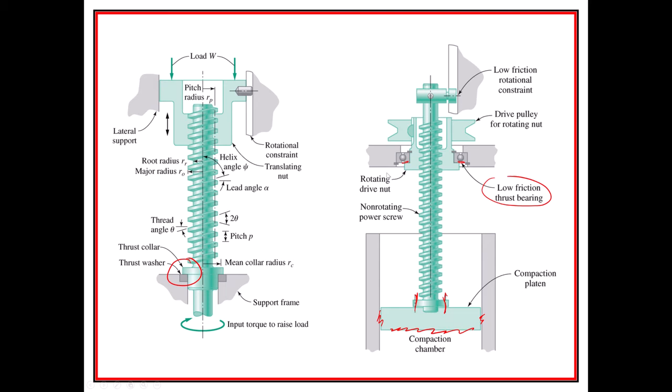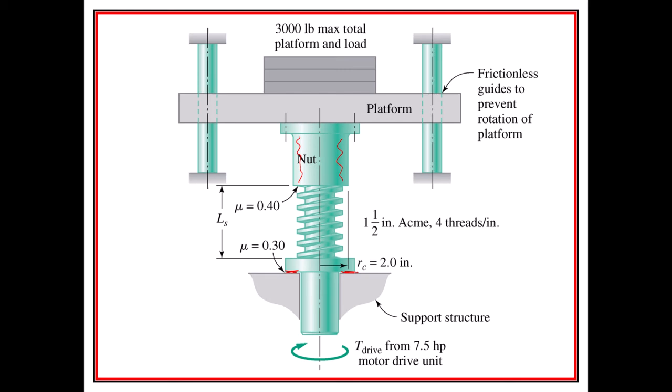So you have to think in those terms that there are lots of different places where this could have friction. For instance, right here there's going to be friction in that surface. But this right here is a nut. They're not showing the internal threads, as this thing is moving up and down and lifting up this platform. So that's the idea.

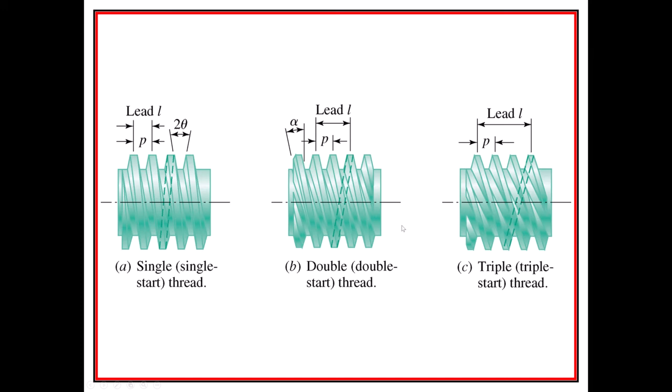Now here's one where they were showing single threads versus double threads versus triple threads. As I mentioned in the last class, a water bottle top is an example of a triple thread, or a toothpaste cap.

Don't want to go through this too far, but to figure out the torque required to raise and lower, we take a free body diagram of a wedge of a thread. So we kind of unwrap a single thread for an entire circumference, that's pi times the mean diameter. Let's define the mean diameter as halfway between the outside diameter and the root diameter, that's dm, and it extends to the other side down there.

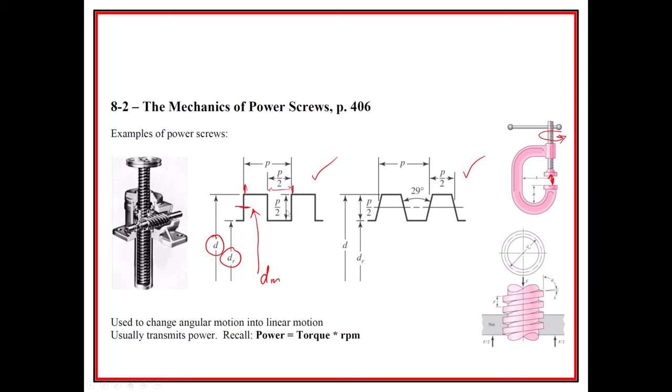Note that the pitch is one thread length, and for square threads, the gap between them is p over 2, and the height is p over 2 of a single thread. Notably, there probably would be a little bit of difference, and there needs to be some clearance between the threads, so the thread width is probably a little smaller and the gap a little bigger. The same would be true on the nut, but you would have it just the right amount.

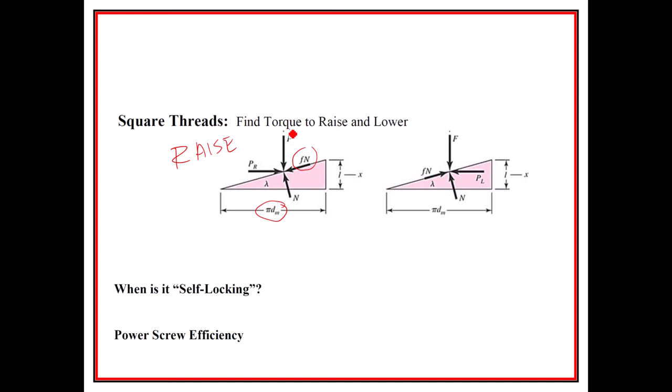So over on the left, we have the raise condition, where we're going to raise a force, and we see there's friction being applied right here. That's the friction, the resistance of the thing. Here's the load that's being placed, and here is the force to raise this piece. The same thing over here, but we have the lower condition.

All right, so we're going to have equations developed from this for raise and lower. By the way, be careful here in the figure, this is just saying it's in the x direction, not minus x. And they're using the lowercase l - remember that l is equal to p if it's a single threaded thing, so L is the lead. It would be 2 times P if it was double threaded, and 3 times P if it was triple thread, but we're mostly just going to deal with single threads.

Lastly, we have this lambda right here, where lambda is this angle, and by definition it's L divided by pi dm, in radians right here, so it would be the inverse tan if we were going to try to get it into degrees.

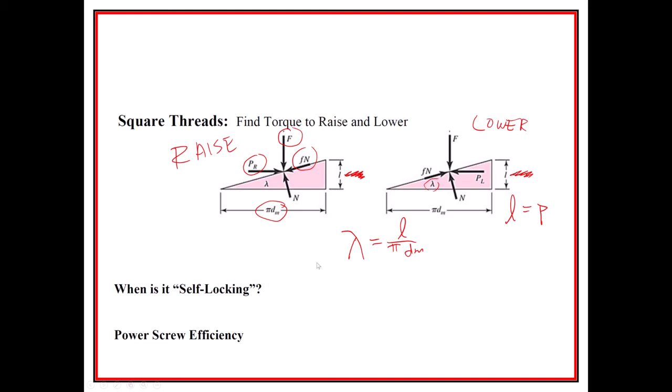So if we do a friction force balance - I think I haven't left myself enough room right here. Because I ask this question after I've written a bunch of stuff, I left space on your page but not here on my screen. So I'm going to keep this and add in a blank slide so I can write this out. I kind of need to turn my screen over while I'm here, so let me flip this over.

Detach it and flip it.

I do like the Surface. I guess it's called the Surface Book, not a Surface Notebook. I don't know, but anyway, let me see.

Let me actually, can I move this thing? Let me see, move, can I? I'll cut it and put it down here somewhere. Paste, can I paste it? There you go, paste it like a picture. There you go. Stop asking me for design ideas. I don't care about your ideas.

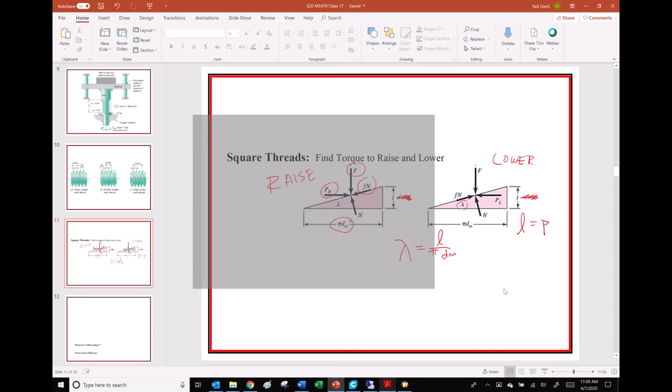And then all of this, let me raise this up. I mean, this was all configured for the projectors at school. So there you go, okay.

So for this force derivation here, let's change to purple. I like it better. We do the sum of the forces in the x direction. It's going to be equal to 0. So that's going to be, let's see, did I do the lower? I guess I only did the lower example. Yeah, okay, so here this is going to be for a lower.

This is, of course, in the book so that you can read it yourself. But I put negative PL right here, so you'll see negative PL minus n, all right, so that's going to be the total n, times the sine of lambda plus the coefficient of friction times n times the cosine of lambda is going to be equal to 0.

And then the sum of the forces in the y direction equal to 0. And we take, that's going to be the load F plus n times, oops, in this case is the cosine of lambda, right? And plus F times n times the sine of lambda equals 0.

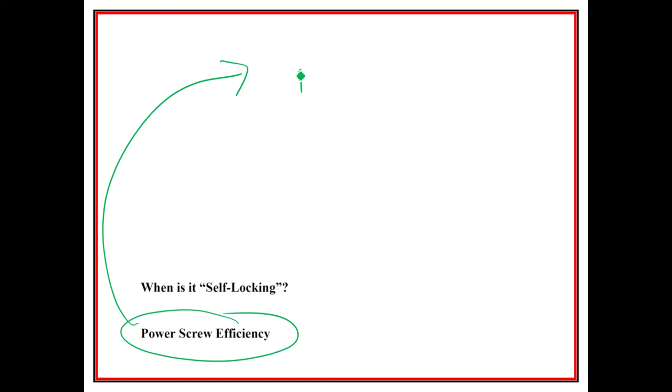If there was no friction, what we're left with is TR equals F dm over 2 times L divided by pi dm. We refer to that as TO. So if there was zero amount of friction, I think the O might mean friction is equal to 0. We end up finding it's just going to be FL over 2 pi.

If we want the efficiency, they decided to go with lowercase e for efficiency. We would say the torque with no friction divided by the torque with friction. So the ratio of the torque without friction divided by the torque required to raise the thing.

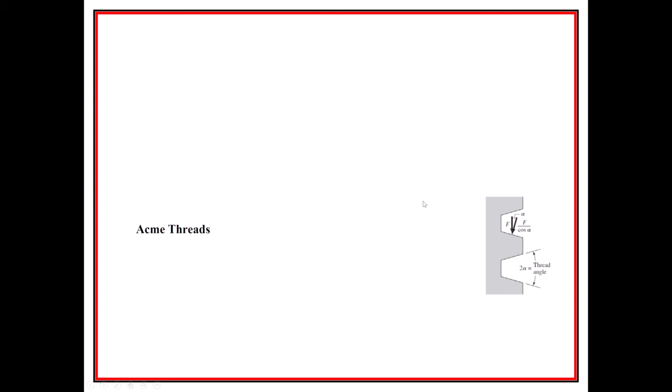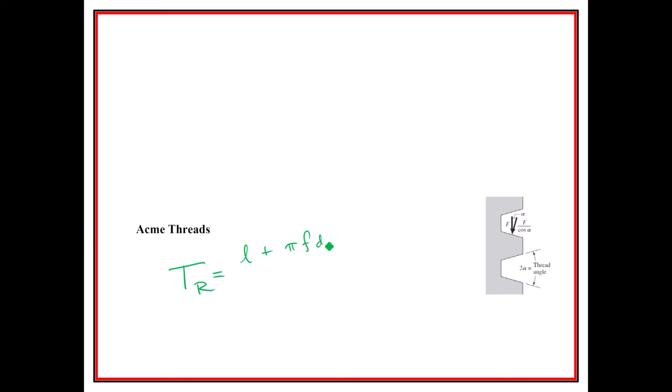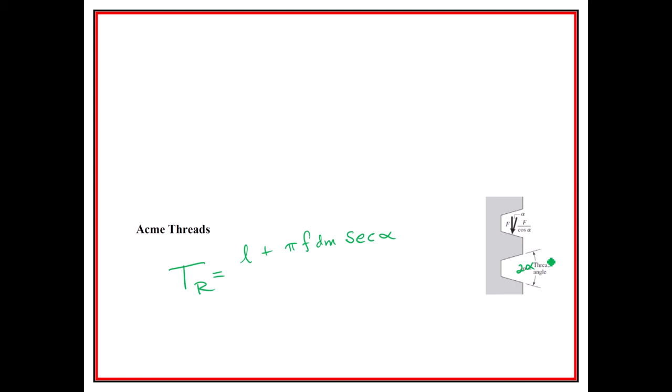And if we were to have Acme threads as an example, the torque required to lift the thing is now going to be L plus pi f dm, and the secant of that angle, which they're considering to be 2 alpha, which I think they said was 29 degrees. So 14.5 degrees would be what alpha was equal to.

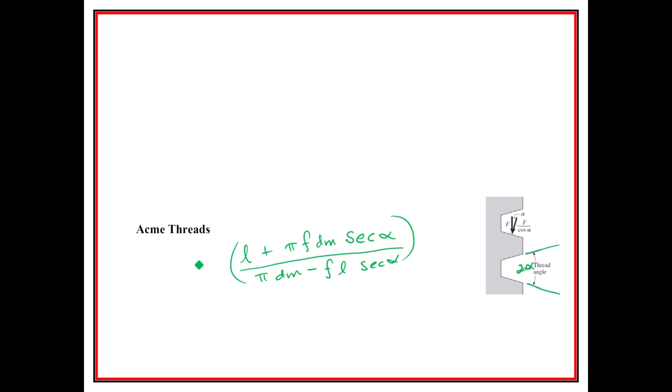I left out some things. So it goes pi dm minus FL secant of alpha, and this just would be F dm over 2. That's the torque to raise for Acme threads, equation 8.5. But we'll just use square threads most of the time.

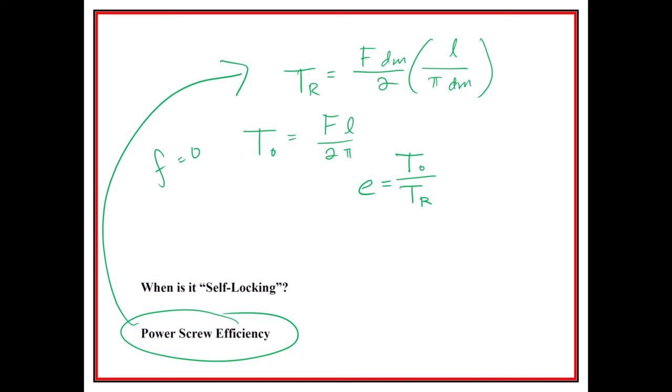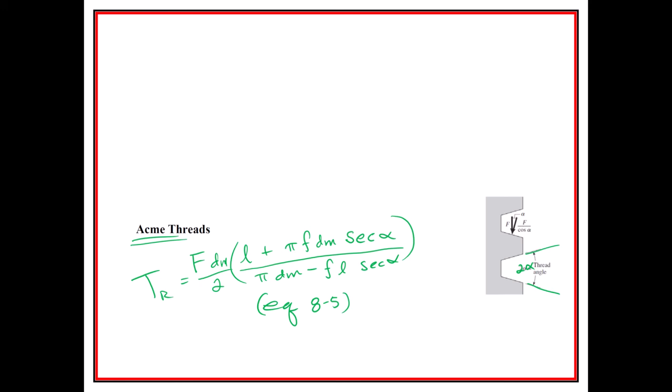When we have to figure out the torque to raise, that is just due to the threads and due to the friction in the threads and the load. And there better be some friction on the threads—we're actually relying on the friction of the threads. I want to make sure I remember to make an important point about this in a second.

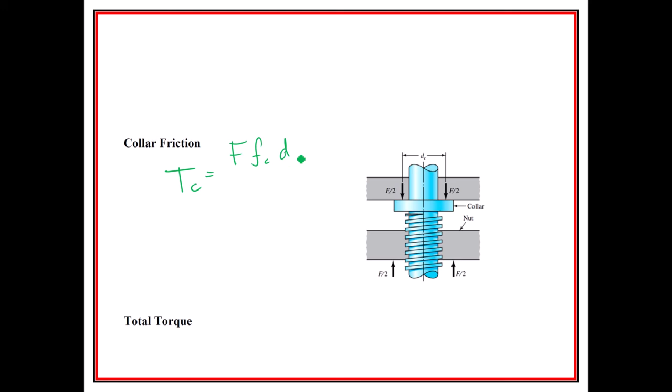The collar friction is something similar, a simple equation, but now we have a separate coefficient of friction, and some imaginary diameter that they decide DC is going to be, kind of an average thing, called the collar friction diameter. So the collar also can have some friction.

We want to look at finding the torque to raise it. We have the raising torque and the lowering torque, and we want to get the total torque. The total torque to raise is the torque to raise plus the collar torque, since the torque due to the collar still makes it difficult to raise the thing. This is the amount of torque you need to apply to the screw to get it to do its function.

As typical values, here's the important thing I wanted to mention: we are relying on the coefficient of friction to calculate these things, and that's a very hard thing to actually find. If you want the coefficient of friction, take a look at table 8.5 for F.

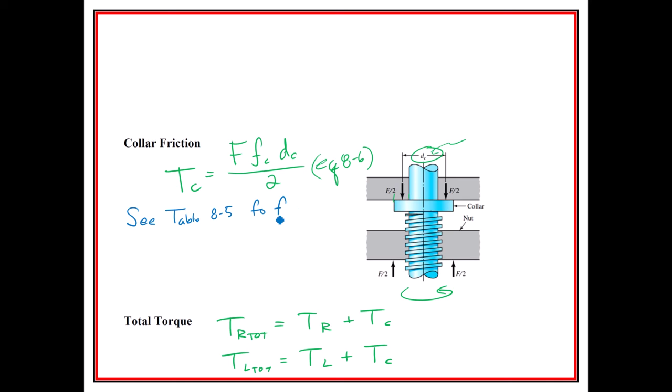What you'll find is that for steel, typically it's going to be 0.15 to 0.25 dry, and 0.11 to 0.17 oiled. So whether the thing has lubricant in it or not makes a difference in the coefficient of friction. It's a little bit unsettled.

We don't quite know—there could be corrosion in there, there could be some grit inside there, or they could have made really, really smooth surfaces, so the coefficient of friction is less. So there's a degree of uncertainty that we have.

If we wanted the collar coefficient of friction, that's table 8.6 for FC, and the typical ones are going to be 0.19 to 0.12 for running, and 0.15 to 0.17 for starting.

We know that we're going to have a static coefficient of friction, so to get the thing started we're going to have a certain amount. It's interesting to me that they didn't really specify running and starting coefficients for the threads themselves.

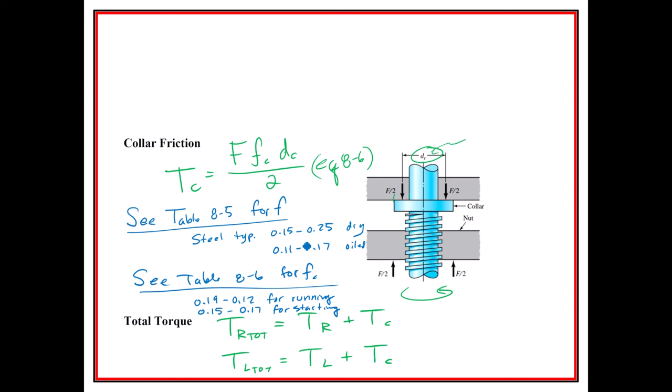Now I want to do stresses in threads, but I'm going to make this a separate video. So I'm going to end this one right now, and you'll be able to get these videos and watch them separately if you want more information.